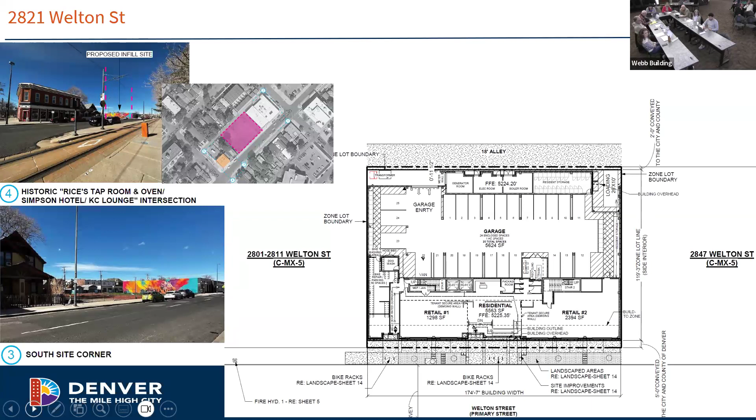The upper floors have less ornamentation, but have typical window rhythms and patterns, meeting design guideline 4.27. Design guideline 4.48 states to use materials that appear similar in scale, color, texture, and finish to those seen on contributing buildings and within the surrounding context.

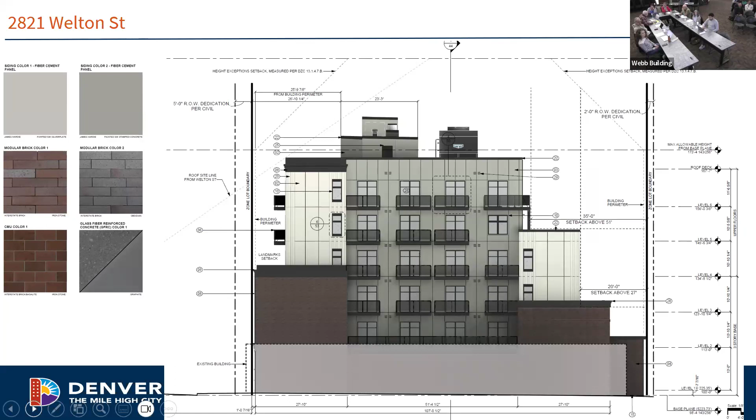And then here's the rear alley elevation. Due to the building's proximity to a protected district, as defined by the Denver zoning code, there are several step backs of the building's rear facade along the alley. This facade does have a simple, more modern design at this elevation.

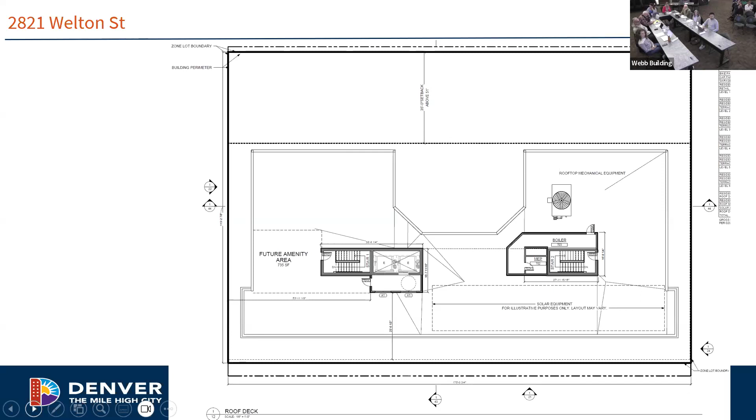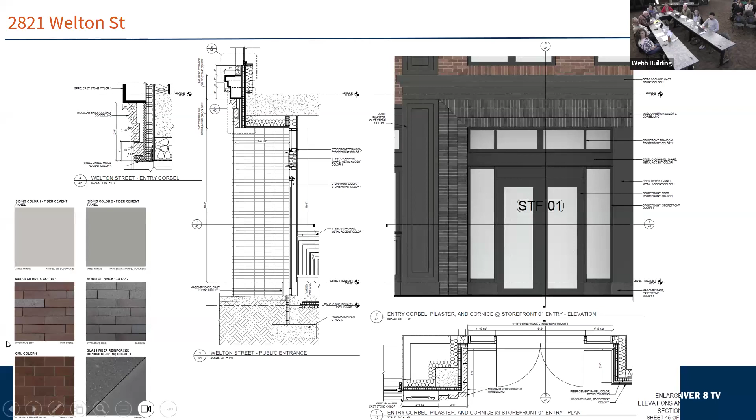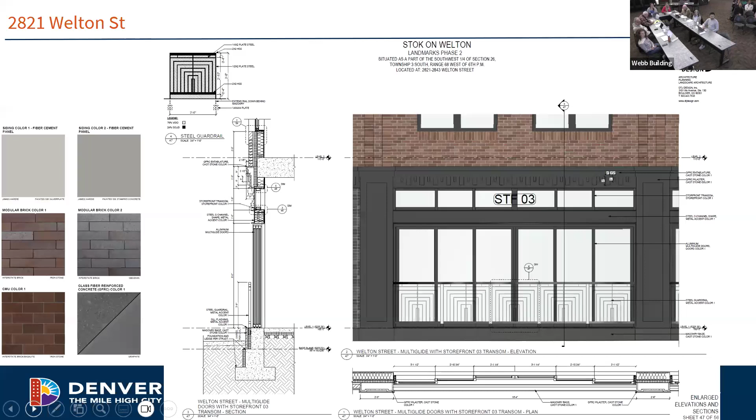The proposed solar railings will have built-in solar properties that generate electricity for the units. The applicants did reduce the opacity of the proposed railings to try to better meet transparency. Intent statement 4AG states to encourage the use of innovative, high quality and sustainable materials. Solar railings have not previously been used in the district, but may be a new, innovative and more sustainable railing solution that may be acceptable in this instance and at these less visible locations on the structure.

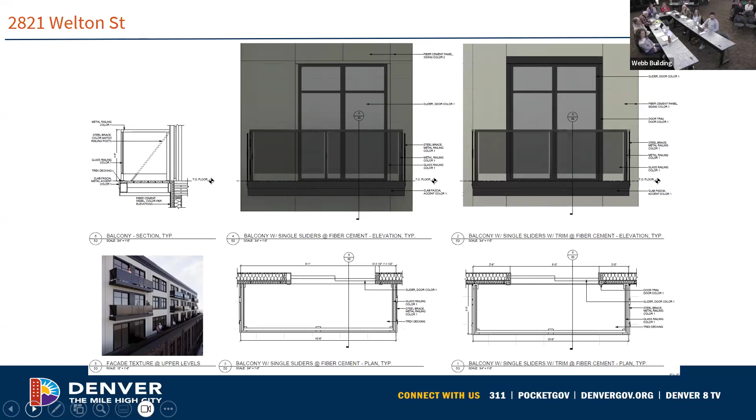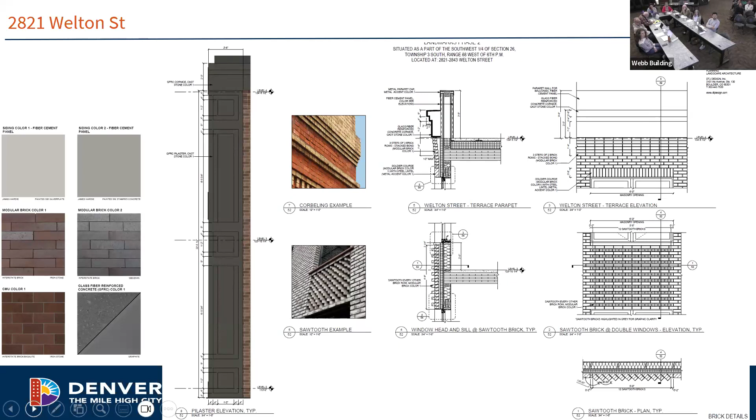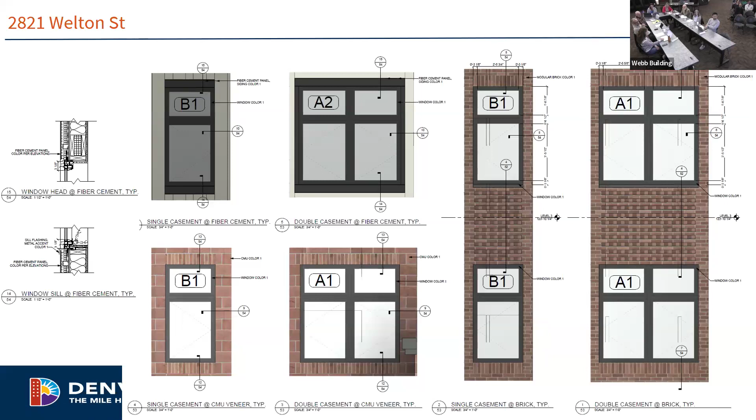And then finally, the applicants are requesting an administrative adjustment to the upper story setback requirement at the alley elevation. The applicants are requesting to encroach into the upper story setback at the 27-foot height along the alley for the 2-foot cast stone parapet at the 3rd floor terraces. The encroachment on the setback is for the parapet to function as a guardrail required for safety and functionality of these terraces. The Denver zoning code states that the commission must find that development conforming to the requirements of the zoning code would have an adverse impact upon the historic character of the district or a historic structure.

Therefore, staff is supportive of the administrative adjustment, since developing a design meeting the requirements of the zoning code would have an adverse impact upon the historic district, as the design would have to be adjusted in a way that would not match the surrounding context in either 5 Points or Curtis Park to the rear, which abuts the district from the alley elevation.

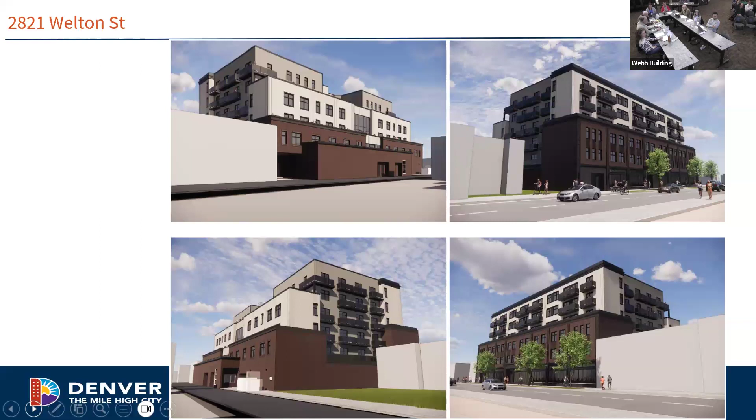And then here are just some perspective views of the proposal. At the top left is that alley elevation, and then the front is the right side. And then finally, just some isometrics.

So staff supports the current design, believes it meets the design guidelines and fits with the context of the district. Therefore, staff is recommending approval with one condition, that all the windows have a minimum 2-inch inset.

Okay, great. Crystal, thank you very much. Commissioners, do you have any questions for Crystal? No? Okay, I do.

The area where the encroachment is occurring, what does that band relate to in terms of the historic district? Does it relate more to another architectural cornice banding? It's more that it's just continuing the horizontal banding that's on the proposed structure and that's found in the district. So it's on this corner, but if it was 2 feet lower, I think it would end right at that line, so it would just cut it off and lower it.

And then I don't think they would be able to use the patios, so they would have to cut those out, because they wouldn't have a tall enough terrace wall. So it's really the location that's driving the use as a terrace wall, not necessarily relating it to some other character-defining feature in the district.

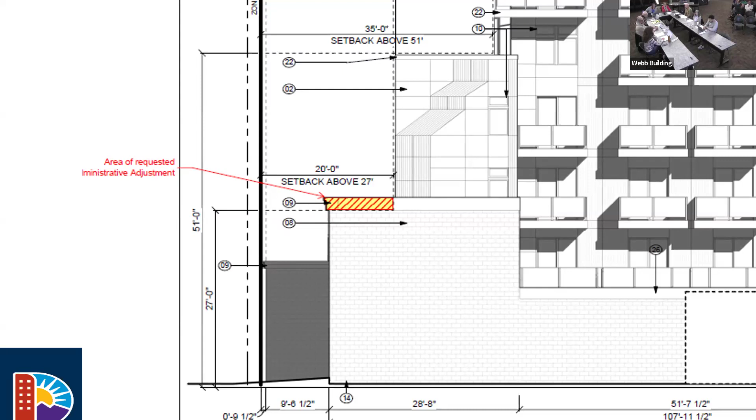Great, anybody else? Question? Okay, perfect. Crystal, thank you very much. The applicant's here. Yes, would you like to come up? Sure.

So you will have 10 minutes to tell us about your project, and at the beginning of the 10 minutes, please give your name and address for our records. My name is Joseph Sammartino. I'm an architect with DPJ Design. An address, you said? I live in Frederick, Colorado.

So I really, well, thank you for hearing us. And I want to just speak quickly about the administrative adjustment request. There are really 6 elements that are driving our request for that adjustment. 2 of those are comments from site development plan and planning.

The first is the building, because of where it's located with the 100-year flood, the flow line is such that the building essentially is up on a plinth, a concrete plinth, to have the front entry be out of the flood zone. Doing that already starts us at a higher level, so it impacts the elevation towards the alley as well.

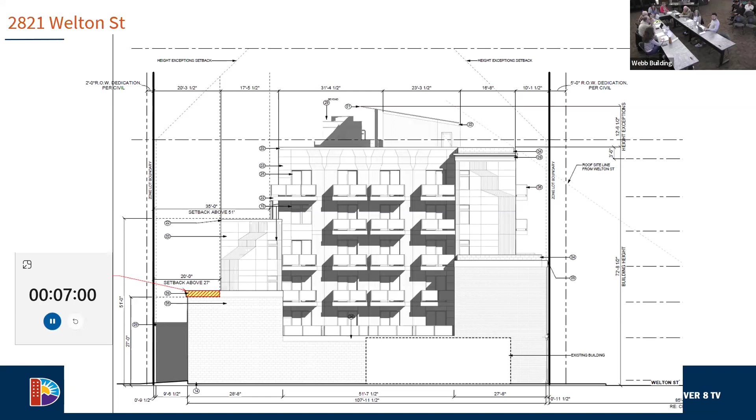And then the three real reasons that relate back to the landmarks are: one, it's four-sided architecture, we're trying to also create a presence along that alley that's not back of house. We're trying to give it a facade and a character. It's establishing a base and creating a datum that's prominent along that alley as well, and then the horizontal banding and the detailing of a cornice at the top to provide a top of wall. So those are the three elements that relate back to this group.

Other than that, I simply state that I know some concern is about the occupancy and the number of people that might be on those terraces. There are 6 private balconies that are there.

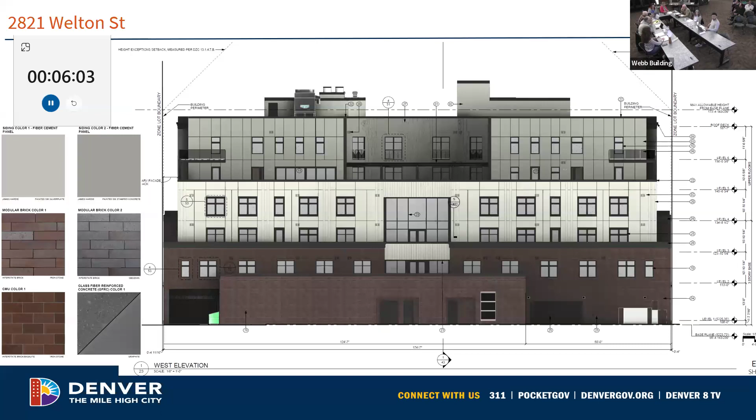These are efficiency dwelling units. We're not anticipating large numbers of people there. And there is a central amenity space, a small living room. The entire balcony in that location is 200 square feet. That sounds like a lot, but it's really not. Once you put furniture, plantings and so forth on it, we're thinking less than 10 people. So all said and told, it's not heavily occupied. It's enough to have eyes on the street, people present, some activity along the alley, but it's not going to be masses. That's the best way to describe it.

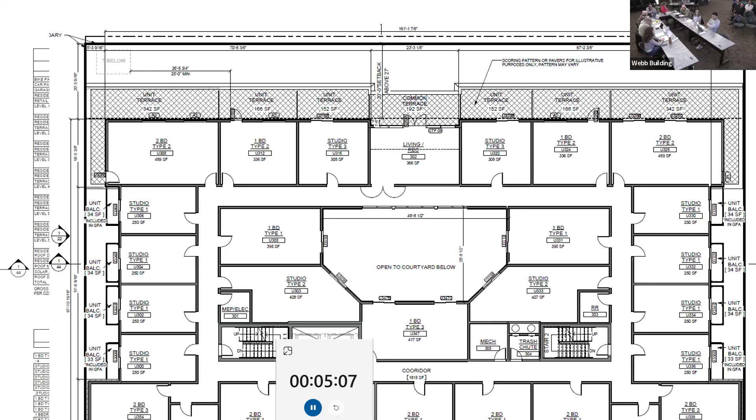I think that sums it up. Okay, great. Let's see if anybody has any questions for you. Commissioners, questions for the applicant? Gary, did you want to follow up? No, I think you understand what was going on. No questions? Well done, thank you. Okay, great, that's wrapped up.

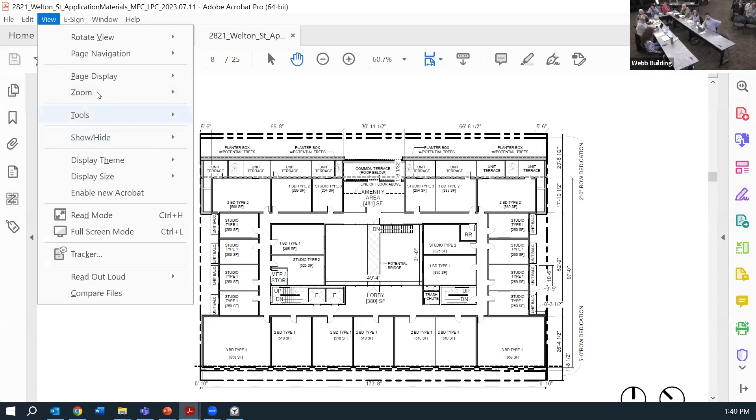Almost. So I'm showing on the screen for everyone attending the meeting the phase one submittal, third floor plan, level 3.

Thank you, sure. Any other questions? Brittany, Crystal, thank you, okay great. Then there are no more questions. Let's go into deliberation. Commissioners, what do you think?

Our purview, of course, we have to remember is, does this meet guidelines? It's not necessarily the safety or the quiet or that kind of thing. Or the program, the use of it, right? Correct.

To me, this seems very much like we've had other cases where there have been setbacks that require an administrative adjustment because there is some kind of utility line. We've done this in Curtis Park, there's a whole neighborhood where we adjusted the setback. In this case, because of the floodplain, it seems somewhat a very similar situation where the building is higher to deal with the floodplain, and that's what's pushing the guardrail up. Since in phase one we knew those balconies were there, to me it's a very similar situation. So I'm in favor of approving the administrative adjustment.